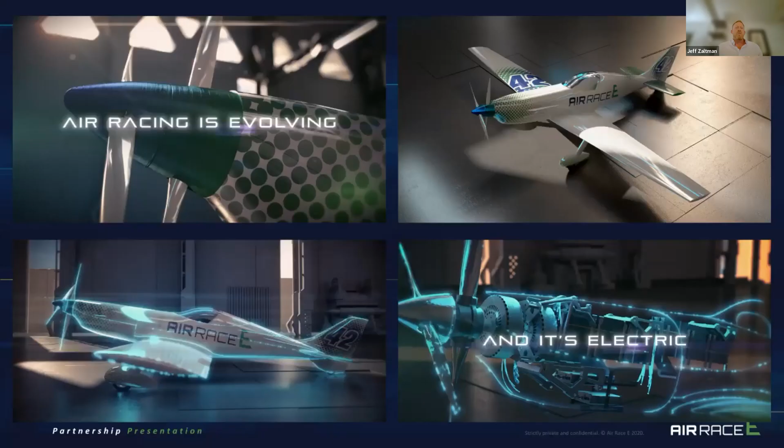As Phil mentioned, I'm going to give you some insight into what we do and why we do it, explain the sport and our objectives. Then I'll hand over to Richard, who will go into more detail on a specific project we're working on together with the University of Nottingham, and some other exciting spin-off projects. So let me start with a bit of background.

What we're really trying to do with Air Race E is, first, take air racing into the future. But in doing so, we're trying to take aerospace into the future by converting it to electric propulsion. We want Air Race E to be a test bed, a platform for the entire industry to innovate and develop the technology, and a playground for the aerospace industry to be developing in.

The easiest parallel is Formula E. Most of you will be familiar with the electric car races, Formula E, and there's also Extreme E and E1 now with powerboats. We're basically doing for aerospace and aviation what those events are doing for automotive and for boating with E1. We're following that Formula E model, both in business model and in objectives and mission. At the end of the day, it's also an exciting motorsport — a thrilling, real, true motorsport.

So close, this battle between the two of them, just meters between the two planes. Are you ready to experience the evolution of air racing? Welcome to the world's first all-electric air race, Air Race E. Prepare yourself to witness the exciting future of aviation and motorsport right now. Air Race E is a pioneer leading the charge in the electrification of aerospace. It is the only electric air race series with manned aircraft pushed to their limits in a real-world mission to win. Pure motorsport in 3 dimensions.

Aviation is going green, and Air Race E is at the center of the revolution, creating a platform for the industry to move forward and accelerate the technology that will help save our planet. New concepts in electric propulsion and hands-on partnerships with aerospace and automotive leaders allow Air Race E to reshape the e-mobility and transport industry. The spectacular and action-packed competition will see top pilots commanding leading-edge technology racing head-to-head at speeds of up to 400 kilometers per hour around a tight circuit just meters above the ground. The true motorsport for the future by the world's leading air racing organization.

Are you ready to meet the future? It's a dynamic sport, and there's nothing like it in the world.

All right, so hopefully that gives you a kind of a flavor of what we do. Now that video is important.

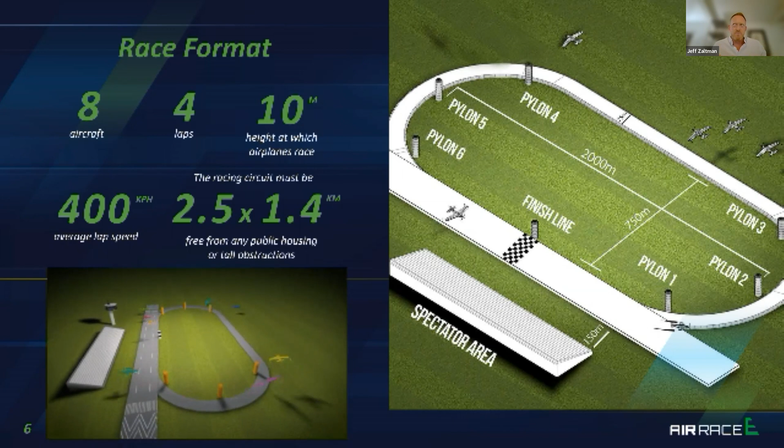I should probably qualify and say what you saw there was called Formula One air racing. It's an existing sport that we organize now. It's a sport that actually has a history of about 75 years, and we've been organizing these events with combustion engines, conventional aircraft around the world for a number of years. And the reason that's important is because we're using the exact same format, the race format, as we do in the current Formula One race for the electric. We're, of course, just changing it to be adapted to the electric propulsion.

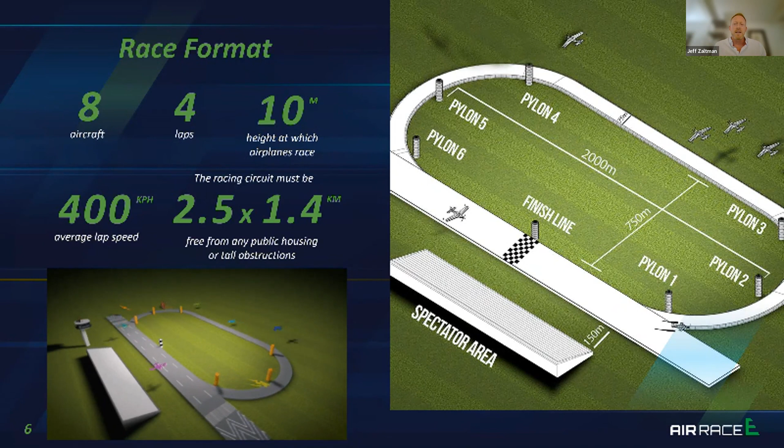So what that means is, as you can see here, it's a series of laps around an oval circuit with 8 airplanes all racing together. First one across the line wins. The key difference, besides the powertrain, is just the number of laps. In Formula One, we do 8 laps, and in Air Race E, we're going to be doing 4 laps.

So this is kind of the fundamental premise, that motorsport is itself a catalyst for innovation and for development. And we know that. In motorsport, automotive motorsport, for example, and other motorsports have a long history and a proven track record of bringing new products to market. And air racing is no different. We actually have over 100 years of history of doing this as well.

I like to use the example of the Spitfire, which is perhaps the most successful warbird, certainly of World War II, one of all time. That actually was developed first and solely for an air race. It was developed for the Schneider Trophy in the UK, and it was built as an air racer. That's what it did through the 20s and 30s before it got repurposed for war, under the necessity of doing that. So there's a lot of case studies of taking technology from air racing and moving them into the private sector, and in that case, military sector.

But that's exactly what we're trying to do now. We're trying to do that same transition of technology again.

And we've got a lot of partners on board that have agreed with that, validated that premise with us. We've got Airbus came on board a long time ago as a founding partner. ANSYS is helping our teams use their simulation software to develop the aircraft. Obviously, University of Nottingham, which you'll be hearing more from in just a moment. A recent one was Casero, a German aerospace engineering company that just came on board a few weeks ago to help us develop one of the classes, which I'll mention again in just a few seconds. So these are really great validations of people seeing our vision, being able to develop the technology that's going to be relevant and meaningful to the aerospace industry.

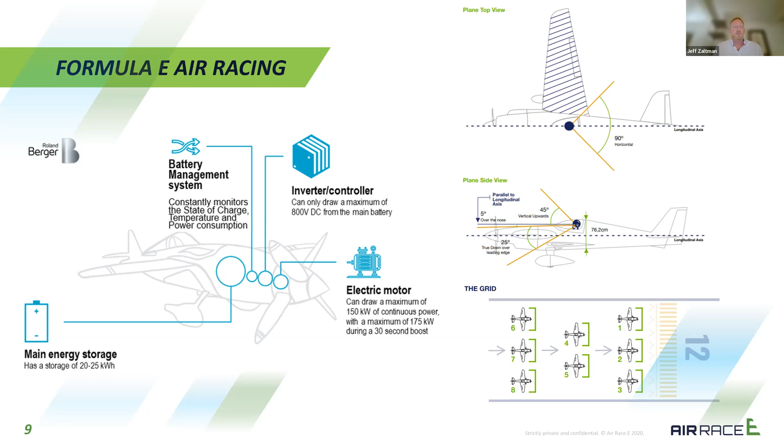This slide, you don't have to worry too much about. It was just to mention that it's a formula race. So the idea is that we write the rules, a list of criteria, it's a formula, and then the teams take that criteria and they can design in a very open fashion how they want to. They can connect those dots however they think is going to come out with the most optimized solution. So that's our principle there. Here we just draw out a couple examples of that.

Now, as I mentioned, the rules are starting with the existing racing rules. We're not trying to reinvent the wheel, we're just repurposing it for electric. So we have electric propulsion requirements. There's a 150 kilowatt power max limit with a boost option, which is kind of an exciting option, they get to boost for 30 seconds. It's a shorter race, it's 4 laps, they typically do it at full power, full throttle, and then they have to have, of course, a reserve left over to land. And the top right point there is really important - it's an open platform. We're trying to keep it as open as possible so that every stakeholder in the industry can join.

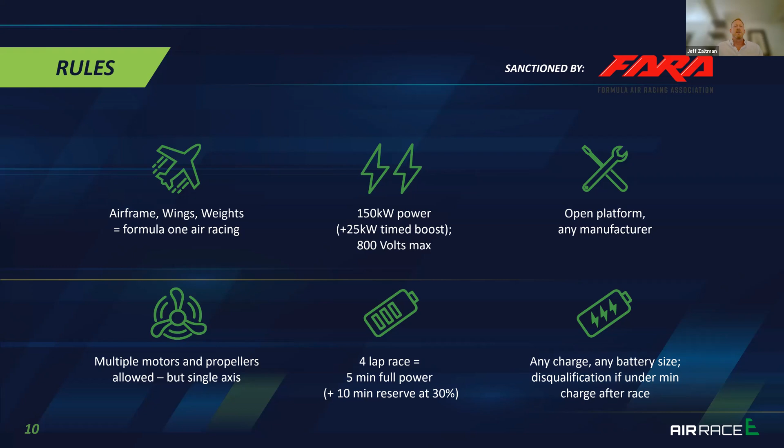Now, everything you've seen up to right now, everything I was just referring to, is what's called the open class. But we've actually added two more classes of race. Based on the success of that and the needs of the industry, we've expanded. The open class is, as it sounds, quite open to any manufacturer, but the performance class is what we're starting with that company, Casero, that I pointed out a moment ago.

What we're doing here is taking under our roof, in-house, the development of 8 race aircraft, electric race aircraft that are going to be retrofitted to existing race aircraft. That's really important because not only do we own the IP, but we can centralize it. Really the important thing is...

This is why we call it the performance class. The idea is to have 8 sort of standard powertrains, but then allow the teams to modify them, and certainly to modify certain areas like cooling systems and inverters and programming. So there's going to be a lot of really interesting comparisons from like-to-like products that are used, operated, modified, maintained, and run in different ways.

How do they charge it for the race? What's their strategy for charging it? How does that affect the outcome? So it's really about performance and optimization, which is really exciting.

And then, of course, as you see there, a vertical class, an eVTOL class, which, as you can imagine, will be a very exciting part of what we do going forward.

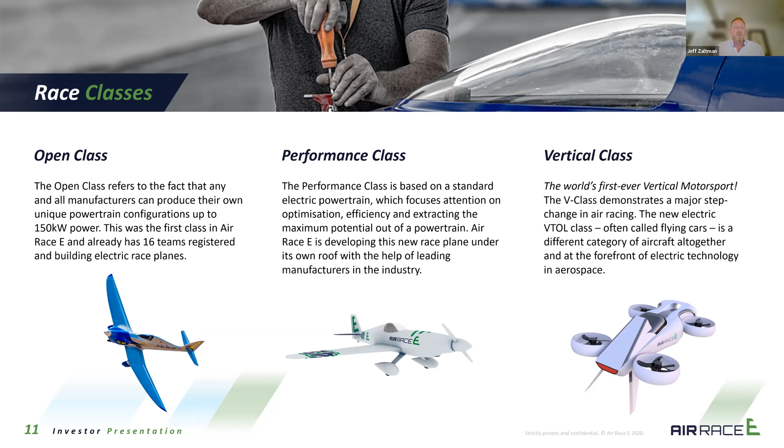I'm not going to go too into detail about the tech and the teams, because Richard's going to give you a lot of really meaty stuff about one of our projects. So he's going to handle that bit, but I just wanted to mention a couple teams that we have, really advanced.

This is our Nordic team from Norway. They are actually ready to go. This plane is in the hangar waiting to fly. It's just awaiting the document from the CAA. All paperwork's been submitted, so as soon as we get that document, this plane is going to do the first ever test flight of an electric race plane, hopefully in the next couple of weeks before the holidays. That's going to be really exciting and a very big milestone for us.

This is an example of the Swiss team. What these guys are doing is exciting also because they're doing a completely ground-up design. They'll also be flying early in the new year, and they've done a completely fabricated aircraft in their own works.

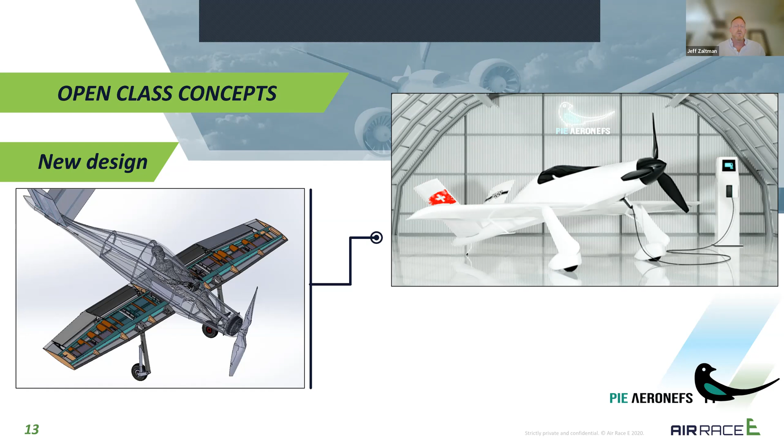What I want to mention about both of these teams is that these are both aircraft manufacturers that want to produce electric airplanes. So what that's done for us is prove exactly what our mission is, that manufacturers will see this as a place to develop and hone products and aircraft that they can actually bring to market. These guys actually want to produce and sell this particular plane, whereas the Nordic team, as you can see, they're retrofitting an existing Cassutt 3M racer.

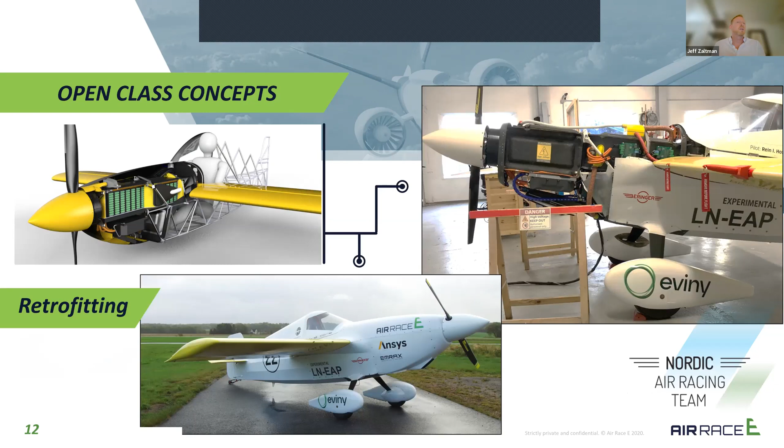So what they're doing is focusing on the knowledge gained from the powertrain itself and certain technologies that they're instituting in this powertrain, and they want to transfer that to seaplanes, which they produce. Electric seaplanes.

Now, none of this means anything if people aren't going to adopt the usage of electric airplanes. It's all good and well to build them, and it's fantastic, pat on the back, but we have to have passengers, right? They have to find a place in the market and amongst users.

So it's really important that we use Air Race E not just as a technology platform, but as an engagement platform, to reach out to audiences and try to explain the technology to them, make them familiar and comfortable with it, and enthused by it, get them excited by it, so that when they have a chance to go in an eVTOL across town or hop in an electric airplane between London and Paris, they're already excited by it and familiar with it, and no one asks any questions about it.

So to us, that's really important. That's where we have a test bed and contact with the end user. And we do that through media, of course. We're very successful in our media on the Air Race 1 side. I should have mentioned Air Race 1 is our brand for the Formula One air racing that we do.

So under Air Race 1, we've got really successful television coverage, media coverage, and that is transitioning and ballooning for Air Race E. So Air Race E is getting tons of attention right now, as we think is justified, and we're really grateful for that attention. Again, that helps us take our message out to the masses.

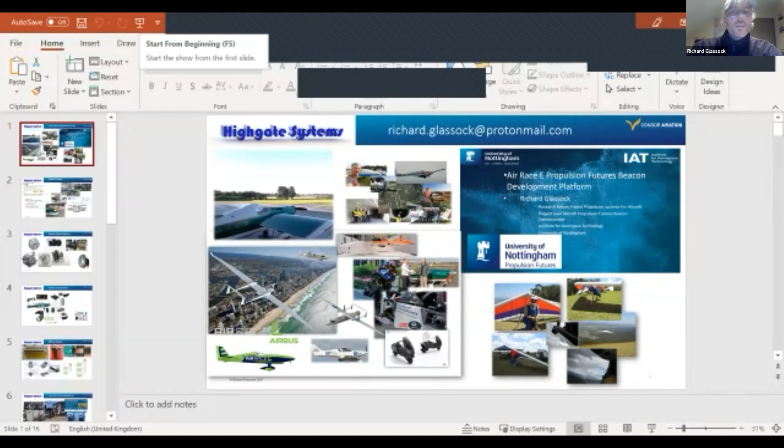All right, that's great. Yeah, so my name's Richard Glassock, and I've just had 5 years as a research fellow at the University of Nottingham. Now I'm working for a small commercial company in North Yorkshire called Condor Aviation. But I'm still very much involved in the project that I'll be telling about, and also some others.

So just as a general flavour overview of the projects that I am doing and some of the other personal kind of background that I've been involved with, and one of the reasons why I've ended up here doing this stuff.

Background, I've done general aviation flying, not a great deal. I'm actually currently renewing my PPL here at the moment, hang gliding back in Australia, where I'm from, and a few of the interesting projects that I've been involved with both at Nottingham and before that.

So I started my research in hybrid and electric propulsion aircraft about 20 years ago, in hybrid electrics for Aerospace, and that's why I'm here. That's what I'm bringing forward to the situation here.

So this project that I'm discussing, that is still being taken forward at Nottingham, was with Jeff about 3 years ago. We wanted to do a demonstrator program in the university under an internally funded program called Propulsion Futures Beacon.

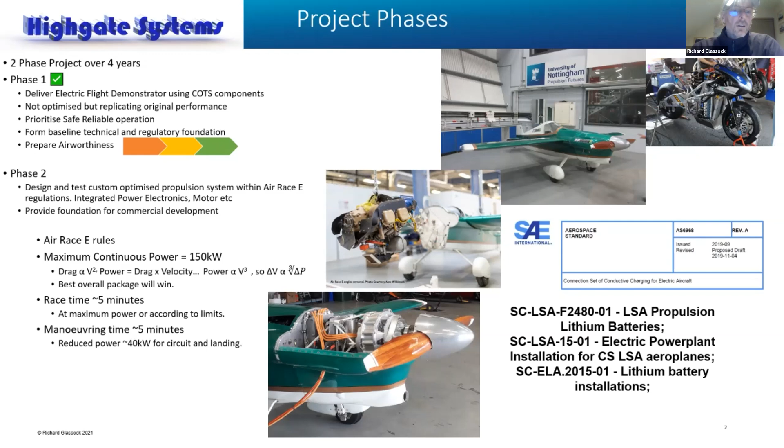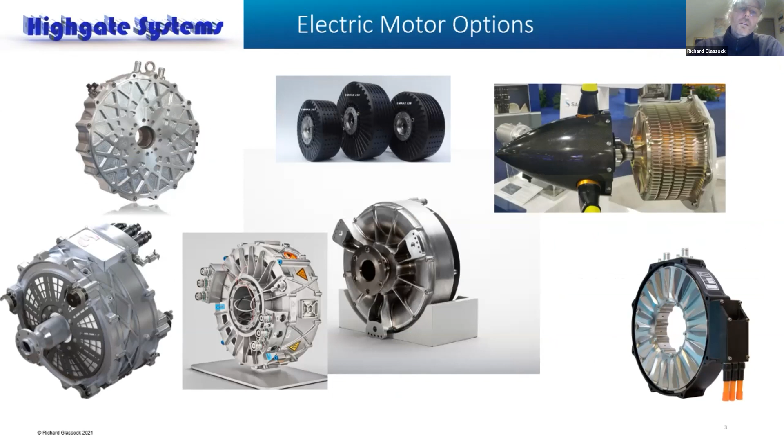So what kind of motors are out there in the commercial space at the moment that we could draw upon to use? I'm just illustrating several here from various suppliers. We did end up choosing one from a UK supplier - this is on the top left, a YASA motor. They're pretty well designed and put in a lot of cars these days.

There are several European suppliers that are quite popular, and I think you saw one of the EMRAX motors on the top middle here, installed in one of those examples that Jeff provided - one of the bigger companies in France or Europe, Safran. Obviously, down on the bottom row here, there are several Rolls-Royce electric motors.

This on the bottom right is an example of how - and I'll refer to this later - the different architectures of electric motors for aerospace is really important. You can see this one's got a very large diameter annulus in the middle of it, and there are some reasons why that can be very useful.

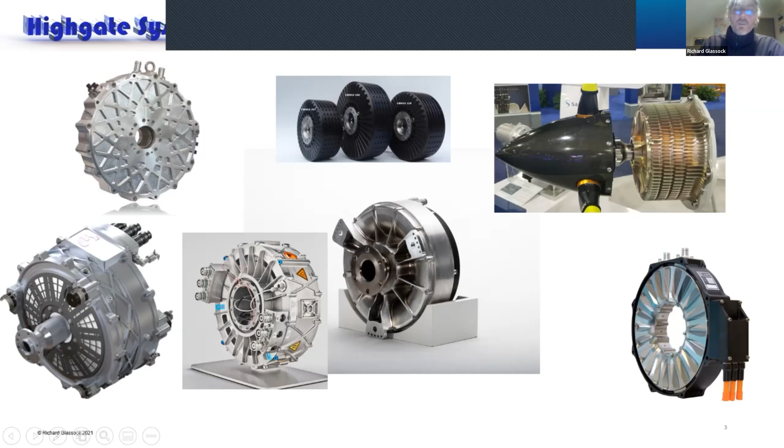So in terms of the component level stuff to change out in the Cassutt, obviously we pulled the engine out and any other associated equipment - the fuel tank, engine controls, and instrumentation.

So what has to go back in? If we just go around clockwise, there has to be a pilot interface, in order to control the inverter. It'll end up being a potentiometer or some other signal kind of device like that.

We've got a pilot information display, which is just an LCD type screen, but it interfaces with a computer. This particular one comes from a motorsport company, Motec, which is very interested in seeing how this will work in an aviation space, but it's again from a sports racing space. So far pretty good - we can fully program what the instrument displays.

There are obviously some very important differences between what you have in an ordinary gas aircraft versus an electric aircraft. You want to know your battery levels, your temperatures, your power output, maybe the torque. There are other quantities you can display that might be different from an internal combustion engine.

The motor itself has to go in - in this case, not in every case, but it's one of the factors of interest. This case needs a cooling system for the motor, which can run at much higher powers if it's got a liquid coolant flowing through it.

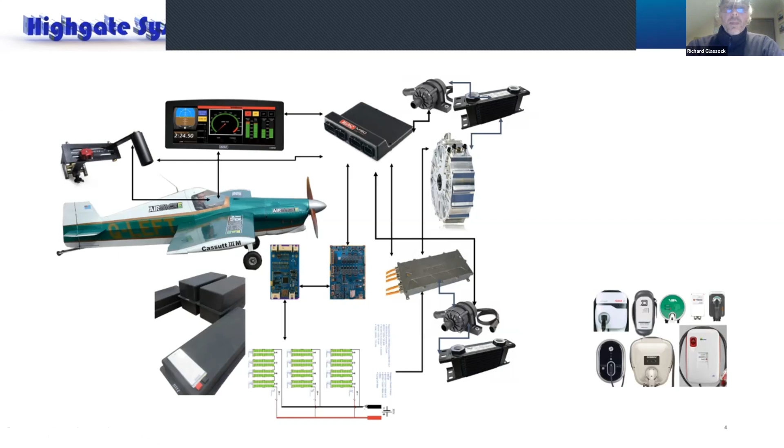So battery system, as I said, we decided to go for these pouch type cells, and I'll show you why in a moment. Basically because the university had already a program that used this type of battery technology. So we get commercial off-the-shelf cells, try to select them to be suitable for the amount of power and the energy density and the power density that we expect to use.

They have to be lined up and put into various parallel configuration and series configuration. We put them into modules, basically sub-modules onto a circuit board with bus bars to connect all of the tabs of the cells, and also some places to plug in monitoring systems. So it's a circuit board that's designed and built in-house at Nottingham.

And we put the modules together into little sub-packs in order to fit them into the boxes, in order to fit them in the aircraft. So we didn't want to change the airframe very much, minimal that we could. So we designed these packs individually. It's an unfortunate thing to have to do, but we really wanted to keep it within the original mold line of the aircraft, so we didn't have to muck around too much with the cowling and the structure of the aircraft. So there's 4 boxes there which will be linked together, and they fit into effectively where the original fuel tank was and the original cylinder head banks inside the cowling.

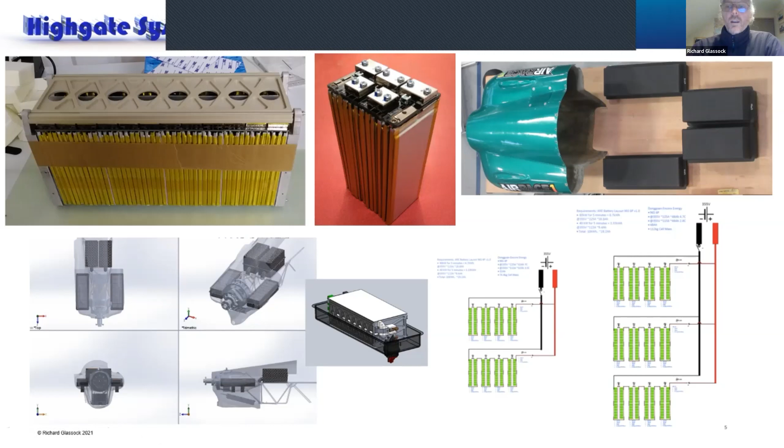And this is suboptimal. As in the previous presentation, you saw a better layout, really, more optimal anyway. But this is a low-risk strategy that we took. So we're keeping the original engine mount system, and this is the only way the batteries will actually fit in. Whereas in the other presentation, you saw the electric motor was actually mounted directly to a battery box. The battery box was a structural component, which is clearly a more optimal way to do it. But going forward, this is probably where we would go to. You could even integrate the external skin to the structure of the battery compartment and the motor mount.

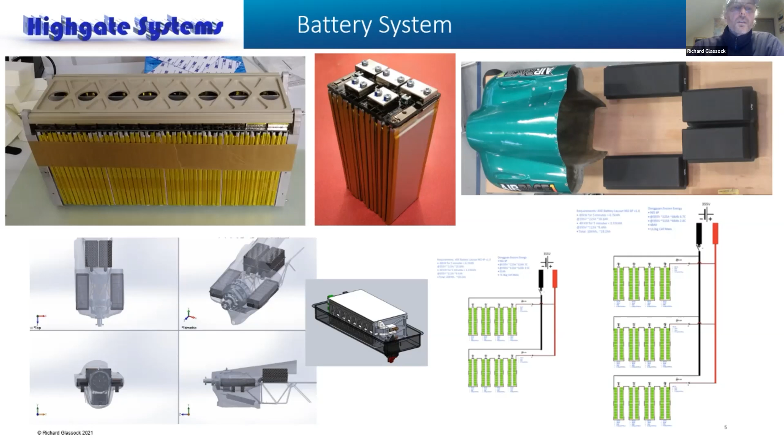So yeah, this is the background of Nottingham in EV racing. TT Superbikes operated the Isle of Man, Assen, and Pikes Peak Hill Climb, and very, very successfully so. And this is completely done, design and built inside the university, something about which they're obviously very proud. And this gave us the confidence to know that we would be able to integrate and develop a system for RAeS.

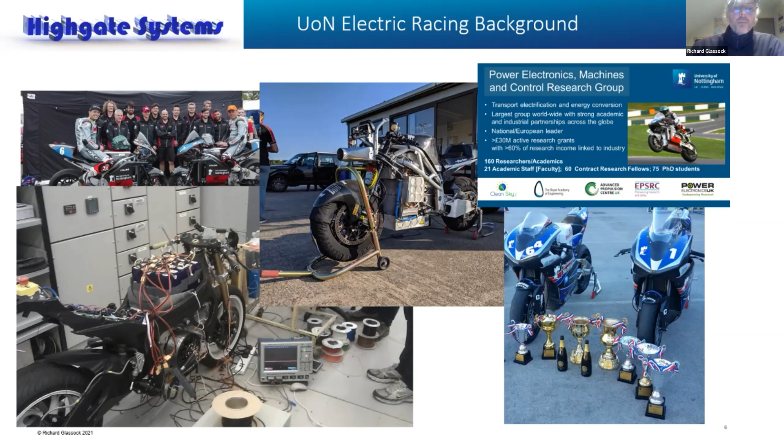Very similar kinds of size, power, and weight in the bike as to the aircraft. As a matter of fact, the bike could actually take more battery because it's less weight sensitive. I think they ended up having nearly 200 kilograms of battery on the bike, something like that.

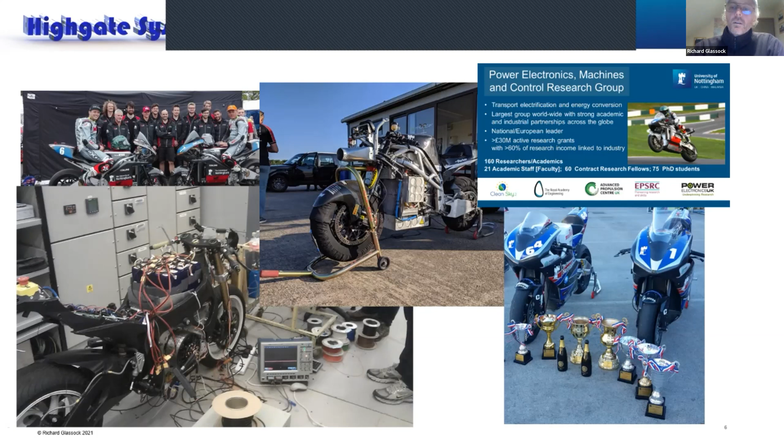A different optimization problem, but again, it's going around a lap circuit, and you have to optimize not just maximum power, but the whole energy flow around the circuit. So you can look into that. I'm not sure if that racing class is going at the moment, but that's where we came from.

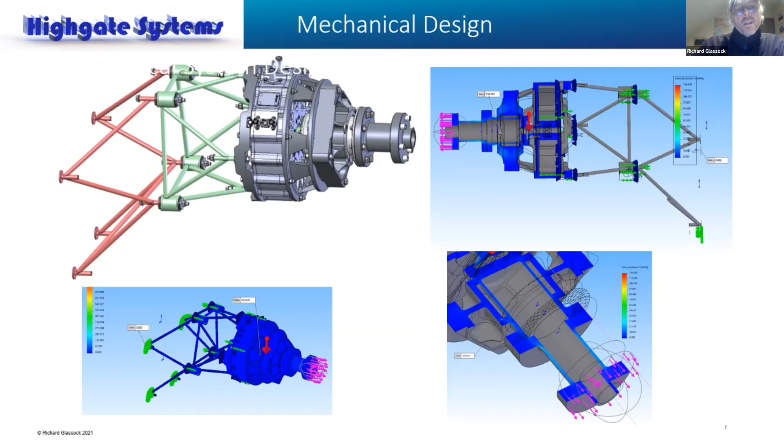So the mechanical design involved getting that particular motor, the YASA motor that I mentioned, into our aircraft with reasonably minimal structural modifications. We decided to use the original engine mount structure from the O-200, and then adapt a new structure to fit this YASA.

Now the YASA motor, as it comes in this particular version, you put a spline shaft onto the rotor internally to the motor, and you can't load that spline with anything else but torque. It hasn't got the bearing system to enable any angular loads or thrust loads.

So we had to design and develop a bearing mount system for the propeller shaft, which you can see at the front of the motor, and then a means to carefully take stress from the propeller load through the motor housing and into the aircraft structure. That has to be done carefully because the motor casing isn't really designed to take those loads either, so we've spread it all out.

We put it into an FEA according to the kinds of loads we expect to see on the propeller. It's overbuilt and could be optimized further. It's heavier than it needs to be, but we believe it'll be a good, safe way to go, and we'll get the results we need.

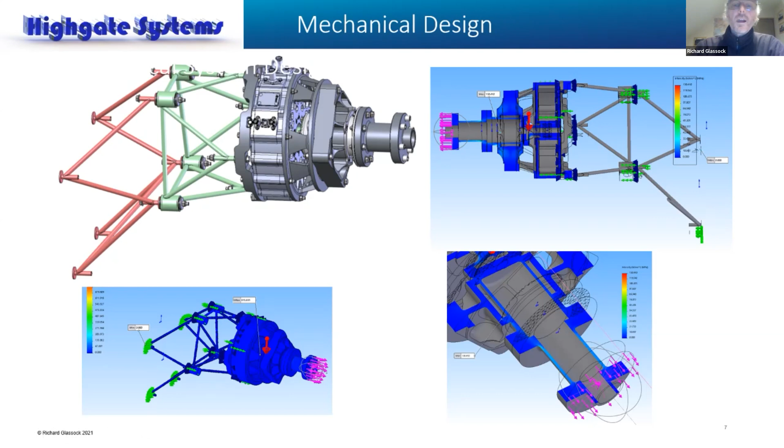It's an interesting design in that the shaft housing system here can be used independently of this motor. We could use the same mounting system for other motors, either direct drive, geared, or belt driven. So one of the trade-offs is having a motor size and torque relationship for the particular RPM that the propeller is best at.

Comparatively low RPM compared to the automotive experience, but it's possible to get a smaller, lighter motor running at a higher RPM, and then you just run a gear drive. So we can do that with this system in the future if we want to.

We also made a large diameter through the annulus of this shaft mount, which can later be used for running a shaft, maybe to control propeller pitch, potentially for running counter-rotating props, and there are other options there. It did require a bit of trade-off in the bearing selection and other things, but I think it's good — we can use this for other motors and designs going forward.

So the process took place about a year, maybe a year and a half to two years back. The Cassutt is a small airplane, especially once you take the engine and the mount off it. So I was able to transport the aircraft to our partners who were doing the aerospace mechanical assembly for us, which is East Midlands Helicopters, just near Nottingham. And this was a good idea for us.

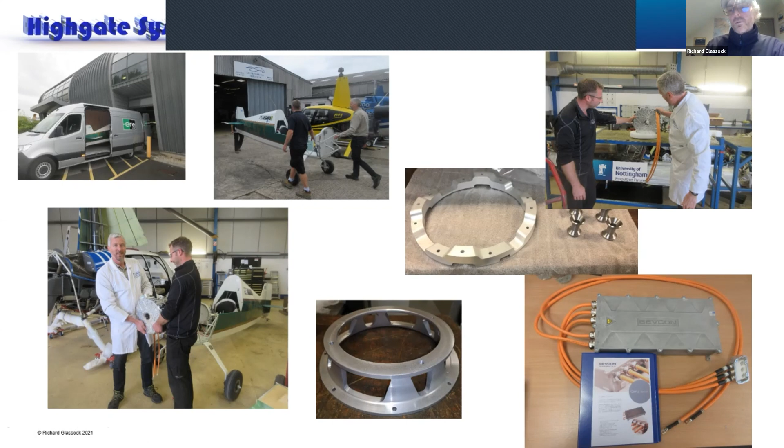The university is not an aerospace manufacturing, design, or maintenance operation. So the helicopter maintenance organisation knows all the ins and outs of how to do aviation-specific, aviation-standard fitting of all these components. So they helped us out really well.

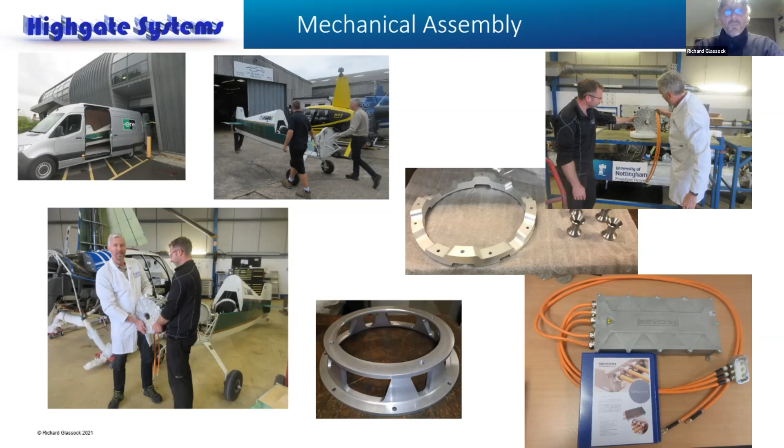We processed that, and after we made sure it fitted according to our design work, we took the motor back out and put it into the lab at Nottingham in the Power Electronics and Machines laboratory on a dynamometer, so we could test the parameters and control of the motor. There's programming, software, cooling — we wanted to get a handle on how it's going to perform in a controlled environment.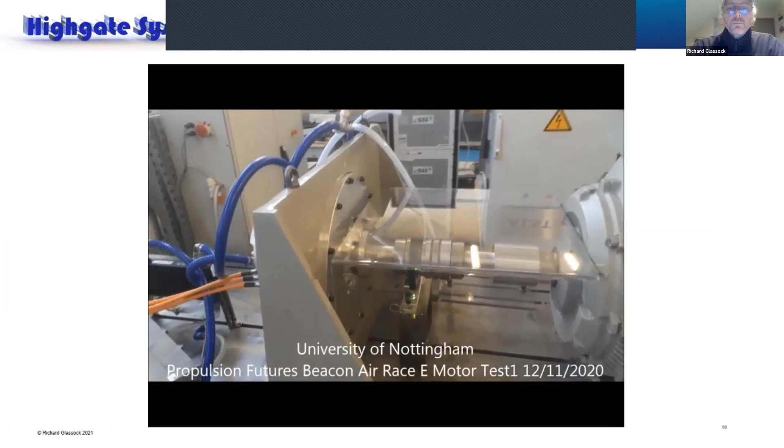That was quite a useful process. We got a good lot of data out of that. We're confident that the motor is going to run up well when we reinstall it to the aircraft.

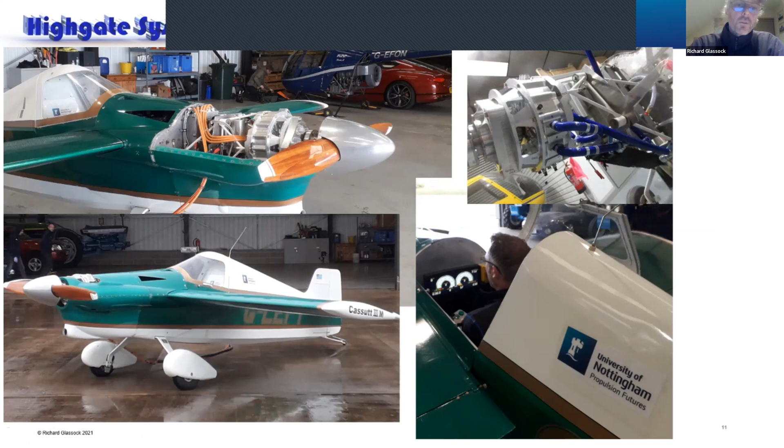The control system, via the software and the little computer that basically interfaces between the pilot and the inverter, worked. And then we got it back in the aircraft for the final fitting and assembly.

The cooling system had to go in, the controls, the pilot interface — you can see that on the bottom right. We're going to reinstall some of the original instruments, not all of them, but you do need some of your original aircraft instruments, obviously your altimeter, airspeed indicator, and things like that. So that's going back in, but the pictures here are nearly complete.

We are still waiting on our battery pack to be finally integrated and resolved. We did run the system on a ground power unit in order to get the initial test runs done. But the battery pack is currently very close to being completed, and then we'll fit that in and do the full power run-ups and testing for that system.

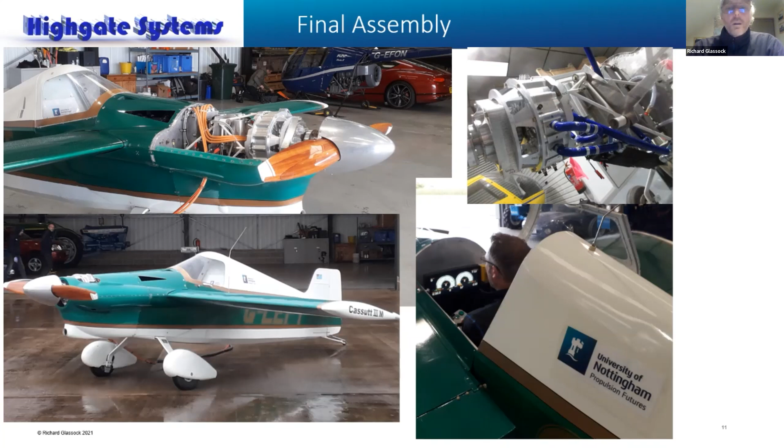So this is a little video that we took about a month or two ago. It shows you the first running of the aircraft.

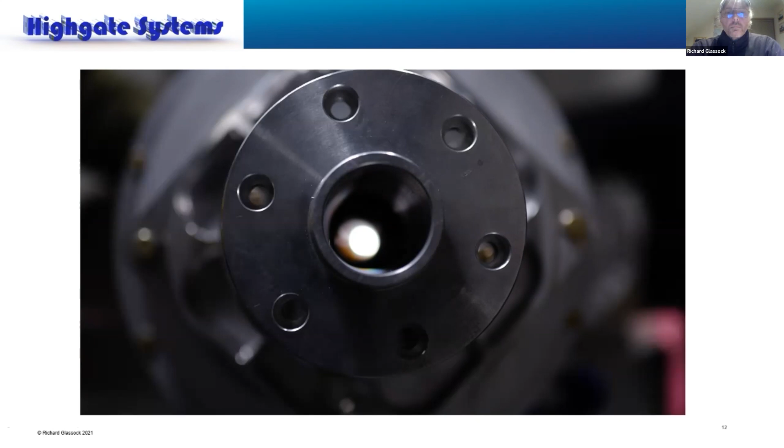The project is a conversion of a small pylon racer aircraft, a single-seat aircraft, from petrol engine to electric propulsion. It's new research, fully electric, and it's world-leading technology. We wanted to keep most of the airframe original.

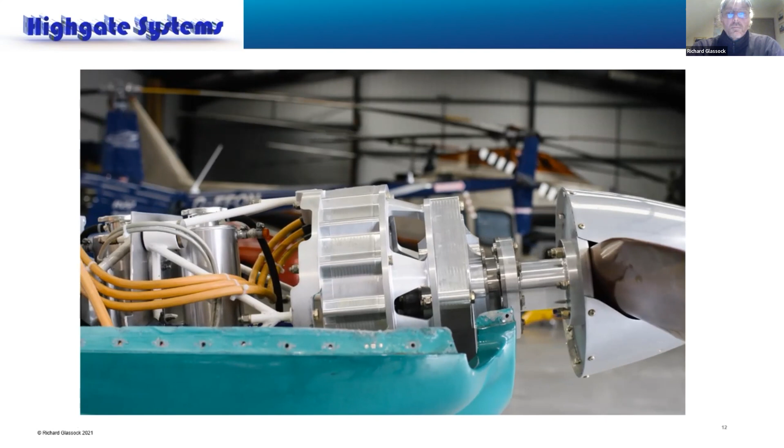It's a much more pragmatic and safe way to approach the problem, so we just changed out the engine and the propulsion system.

To scale this up into larger aircraft, there would obviously have to be a lot more developing and testing at this scale, but realistically this is where we need to go. So to develop it at this stage, it is going to get bigger.

Right, so excuse me.

That shows you the system that we've developed.

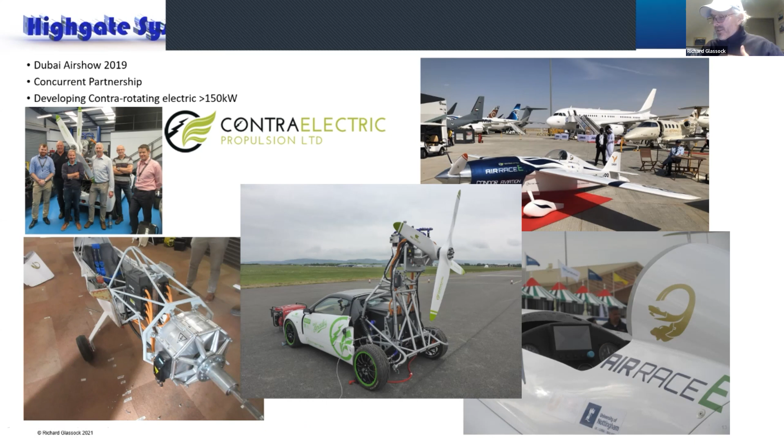Yeah, so that's now in its final stage of integration. As I said, there's more to do.

In the meantime, as we were doing that, I was able to help Jeff and Air Race E and some other partners show what this will evolve into and how it's going to look and run with another aircraft with a different propulsion system. But it's the same kind of motor, just with two of them back to back to run counter-rotating propellers.

So there's a lot of interesting potential for counter-rotation, and electric motors make it relatively straightforward and easy compared to the historical precedent. There aren't many counter-rotating propeller aircraft. There are some in service and they've been investigated, but one of the big problems is the mechanical complexity. With electric motors, that problem comes down quite a lot.

If you've got motors that can have a large diameter annulus in the middle of the rotor, a hollow center, you can run the rear shaft through the whole lot and the front shaft through, and then run these two propellers. So this system was tested quite extensively by Contra Electric.

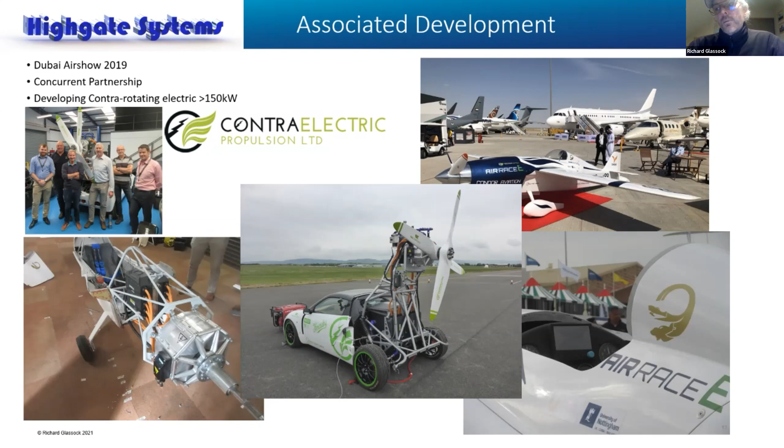We've got it here now in our base of operations, and it's ready for more testing and development, potentially putting it into other aircraft. It's a little bit overpowered for the Cassutt, but there are other aircraft that suit it. And this is about how the Air Race E program starts to develop systems that will be useful commercially, starting small in the general aviation domain.

So one of the research items and commercial items that I've been looking into quite a lot over the last 10 years, with skydiving partners who run big skydiving centres, is how electric aircraft are going to look to them in their business.

What's the performance outcome? And in fact, this is really exciting because you can expect really better performance than conventional engines. There's a number of factors that lead toward that.

Not least that the skydiving operation is really hard on engines. You're really pushing them hard, full power climb through maybe 10, 12,000 feet, and then immediately a rapid descent through the thermocline, with shock cooling issues and so on. Much easier to handle that with electric motors.

The other thing is that potentially you can put a lot more power installed into the aircraft. For this application, you want power, you want climb rate, and climb rate is really directly proportional to power. If you can get more power on board and it doesn't use more energy for the whole job - in fact, it can use less energy because you can run the aircraft more efficiently - then it's brilliant.

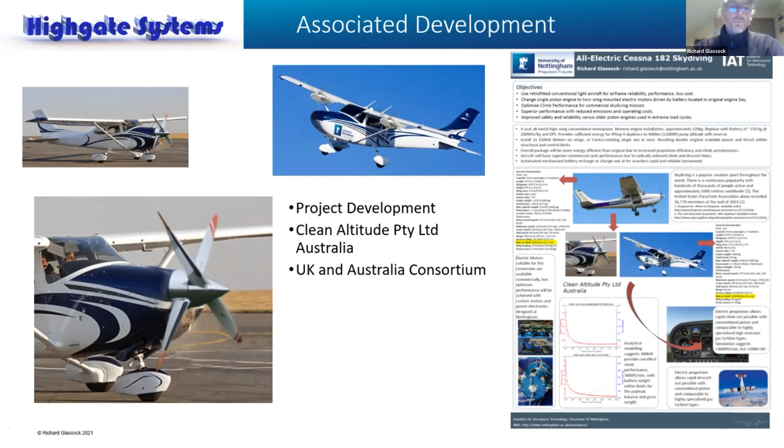I'm interested in some larger aircraft in hybrid and electric. This is a design I've been working on with a commercial client and partner for really 10 years, but originally it was going to be just a conventional gas turbine engine to replace a Cessna Caravan's PT6 engine. I wanted to look at how it might be if it was hybrid and electric.

One of the first things you can do is put electric motors on the wing - you can triple your disc area straight up. You can run a smaller gas turbine engine alongside the electrics out of a battery. You can use the gas turbine to recharge the battery, and you can charge on the descent using the propellers as wind turbines. You can read the paper if you're interested there, but that's the kind of outcome we expect.

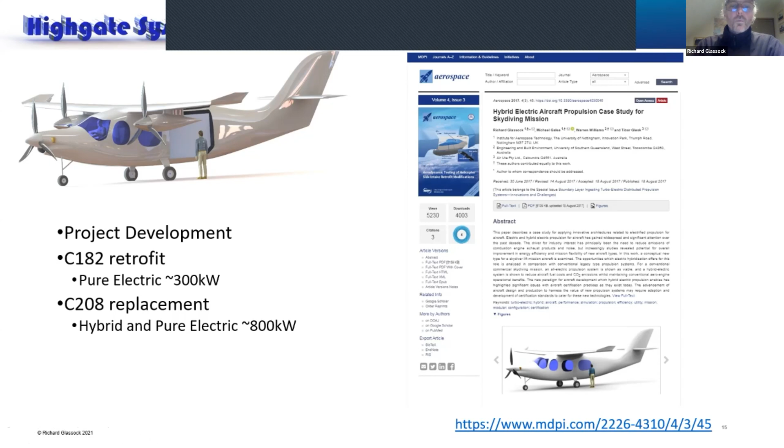It's no problem to turn the engines off in a properly designed hybrid electric aircraft, because you've got instant power available - electric is just, I need thrust, turn it on. A gas turbine or other engines, you need to warm them up, you can't just cold start them and hit them for power. To run a commercial operation, particularly over a built-up area, you've got to have a reliable propulsion system. So that's just an example.